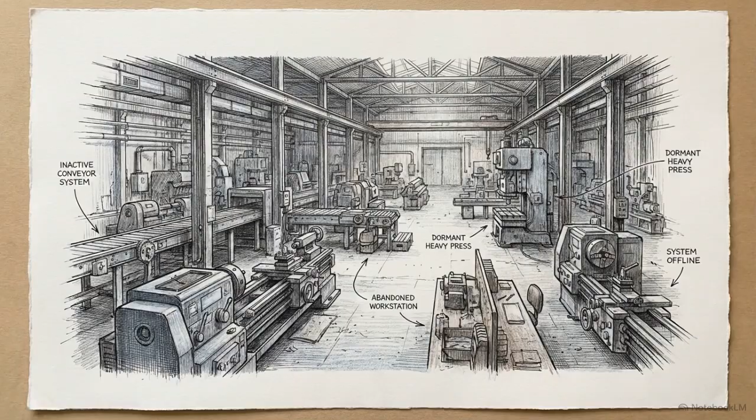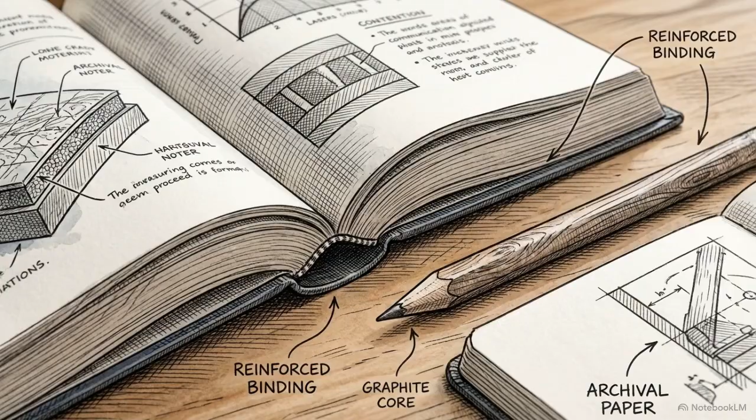By cutting healthcare spending and expanding the labor pool simultaneously, clean water allows capital to circulate back into local commerce. The savings on medicine and the increase in productive hours create a compounding financial effect. This shift generates a calculated 7-to-1 return on investment. Every dollar spent on the infrastructure creates $7 of realized economic benefit, proving water is a powerful multiplier.

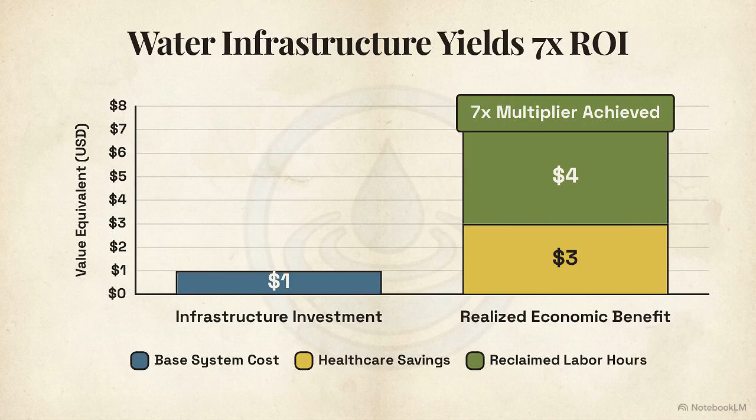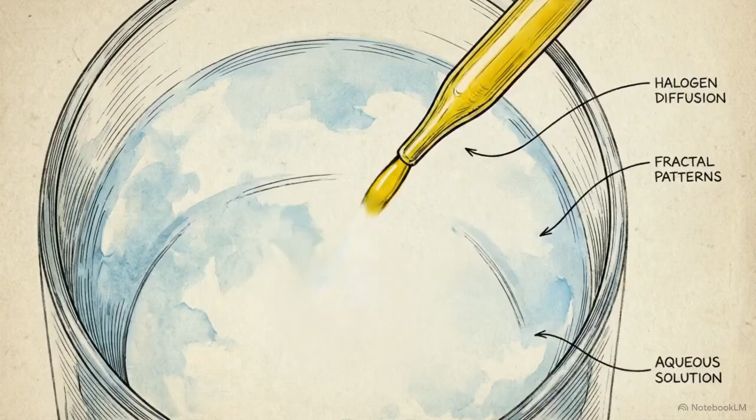To capture those economic returns, modern engineering has pursued a specific mandate, guaranteeing the absolute molecular purity of the water supply. Traditional purification relies on high thermal energy. Boiling water for at least 1 minute effectively destroys bacteria and viruses, but sustaining that temperature requires substantial fuel inputs. Other methods introduce chemical halogens, tiny amounts of chlorine, iodine, or bleach to neutralize biological threats. While effective, these additives change the water's chemical makeup.

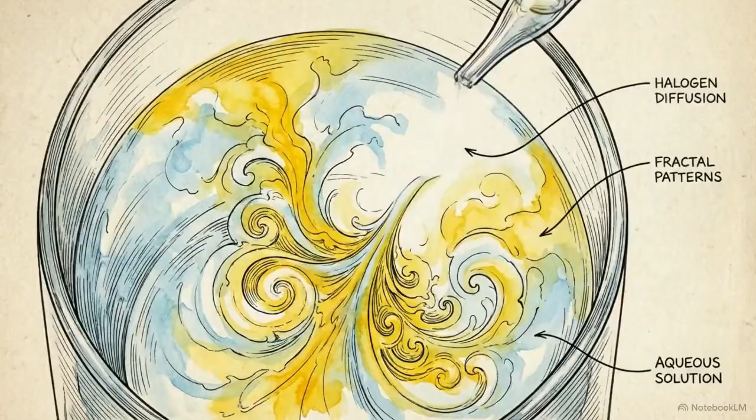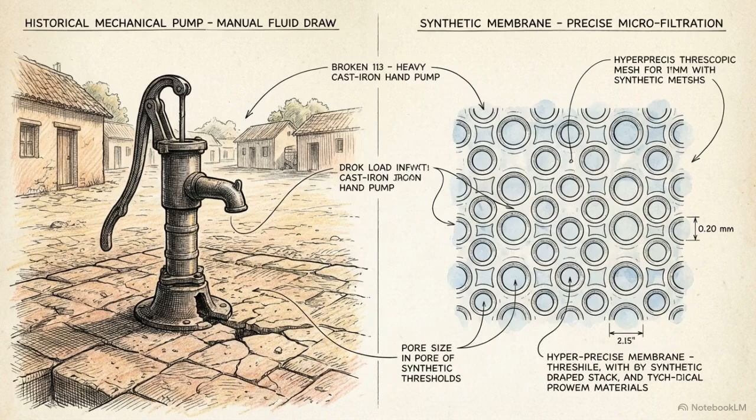Industrial engineering offers a high-tech alternative, precision filtration systems designed to physically extract pure water molecules without relying on thermal energy or chemical additives. If high-tech systems can guarantee perfectly pure water, why are they not the immediate default solution for every community facing a water crisis?

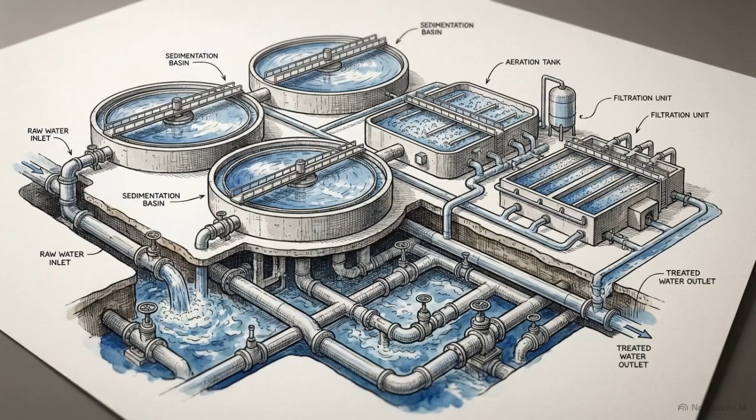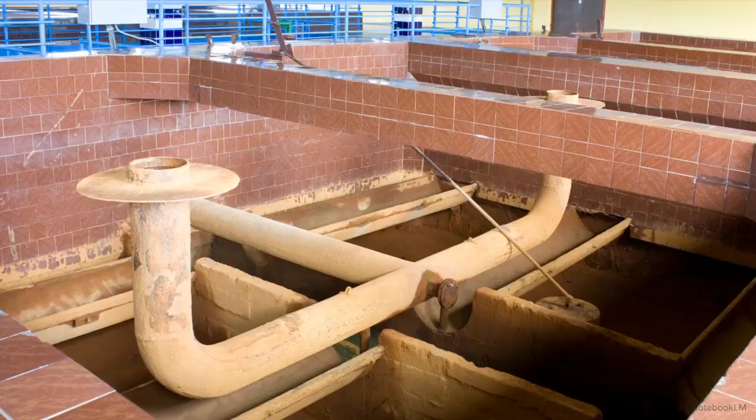To understand the modern approach, we must look at how traditional bulk purification works. These systems sort water based on macroscopic physical properties, rather than microscopic molecular exclusion. Large treatment plants rely on coagulation and flocculation. Chemicals are added to the water, causing tiny, suspended pieces of dirt to stick together into larger clumps. Because these clumps are heavy, they sink to the bottom of the tank in a process called sedimentation, leaving the clear water separated on top.

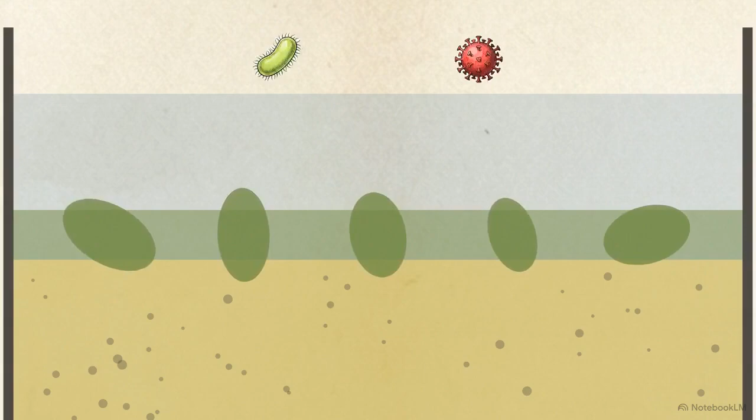Other methods use biological filtration. In a biosand filter, a cultivated layer of microorganisms grows on top of sand layers. This biofilm actively preys on and consumes pathogens as the water passes through. While effective against dirt and some bacteria, these systems struggle to capture dissolved chemical compounds that remain suspended in the fluid. Achieving absolute chemical-free purification requires moving beyond bulk separation to highly engineered physical barriers.

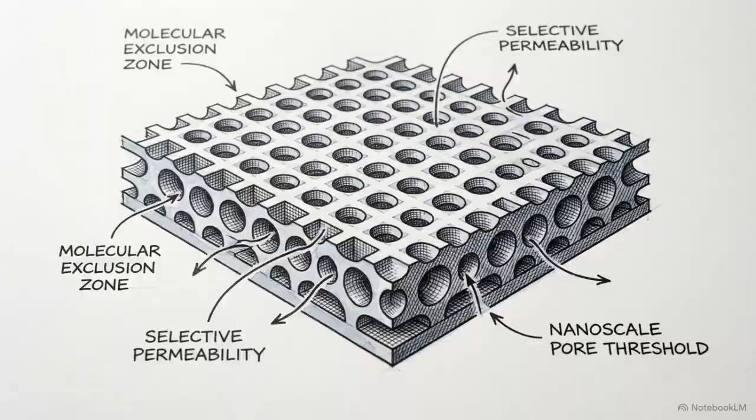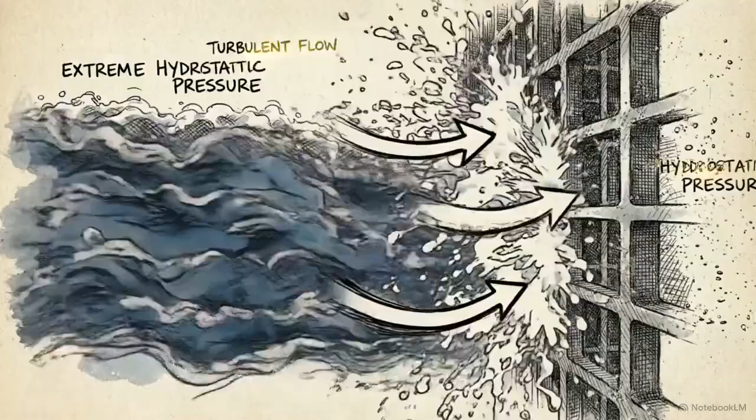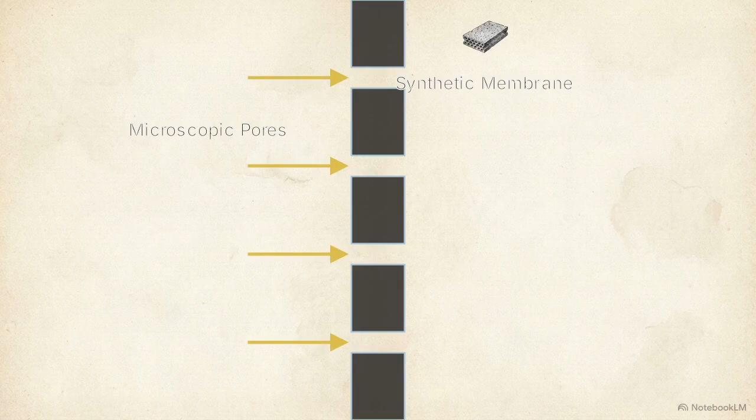This brings us to semi-permeable membranes. These materials act as screens with microscopic holes. Utilizing these membranes requires significant force. High hydrostatic pressure is used to drive raw water directly against the synthetic barrier. This cross-section shows the structure of the membrane. The microscopic pores are engineered to exact dimensional thresholds, creating a strict physical filter.

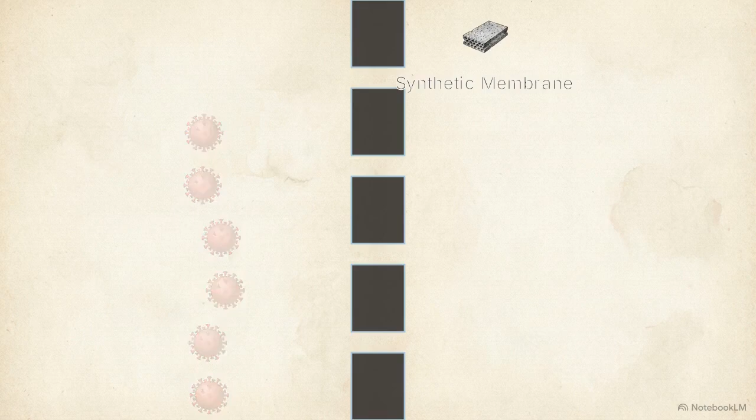Macroscopic dirt and sediment particles strike the surface and are instantly halted, as their physical dimensions exceed the size of the holes. Biological pathogens, including large bacteria, similarly fail to breach the dimensional threshold. Even microscopic parasites and viral agents are entirely excluded by the strict tolerances of the structure. The pores are so tight that even dissolved chemical compounds are blocked, isolating the target molecule. Only pure water molecules possess the precise dimensions necessary to squeeze through the membrane and reach the permeate side. This absolute physical exclusion creates a chemically perfect output.

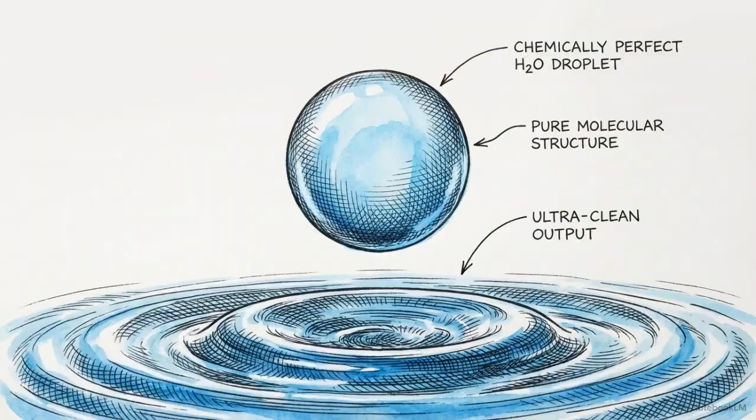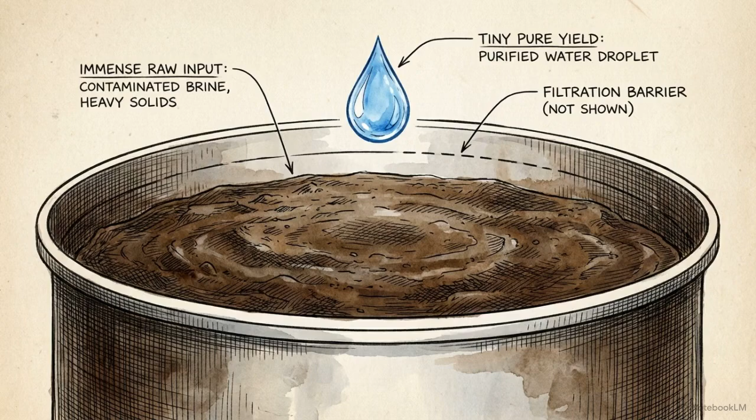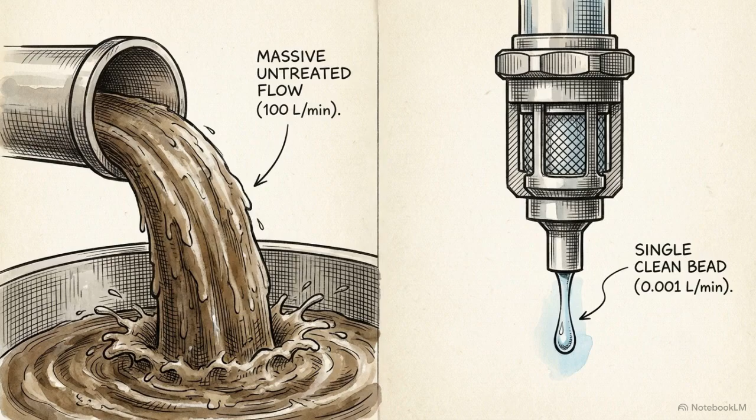However, achieving this microscopic precision introduces severe resistance into the overall system. When we shift focus from the pure output back to the raw input, the volumetric cost of this process becomes apparent. Forcing fluid through microscopic holes imposes a substantial flow rate penalty. These systems clean water much slower than other operational methods. This resistance results in volumetric inefficiency, a mandatory constraint where large amounts of water are required just to operate the system.

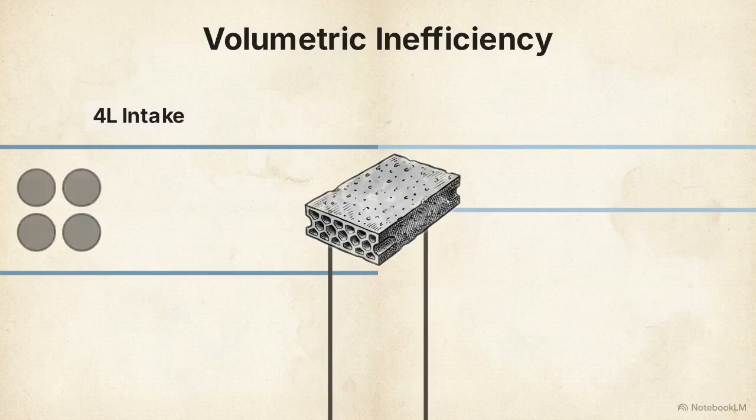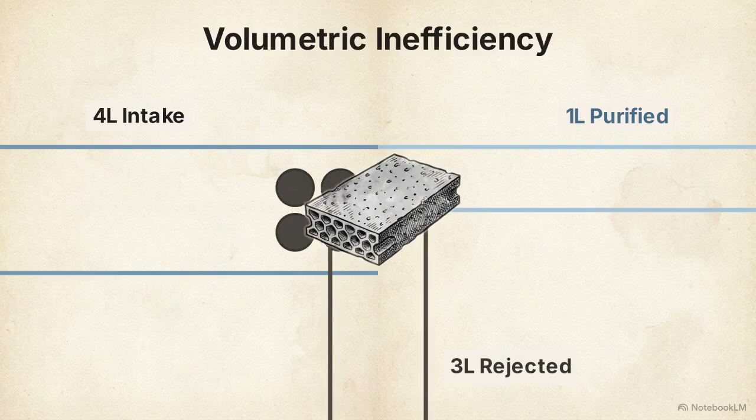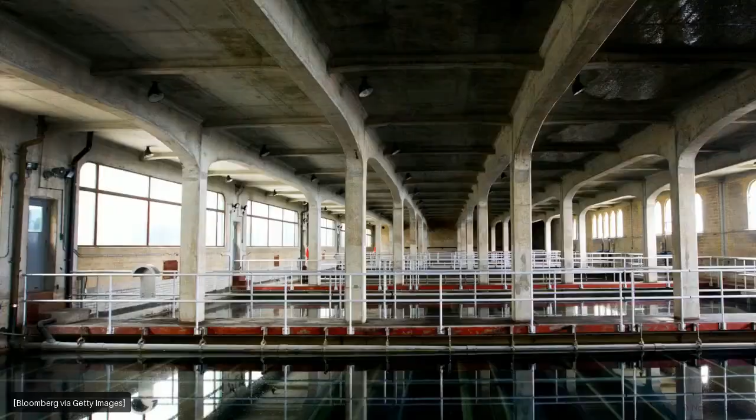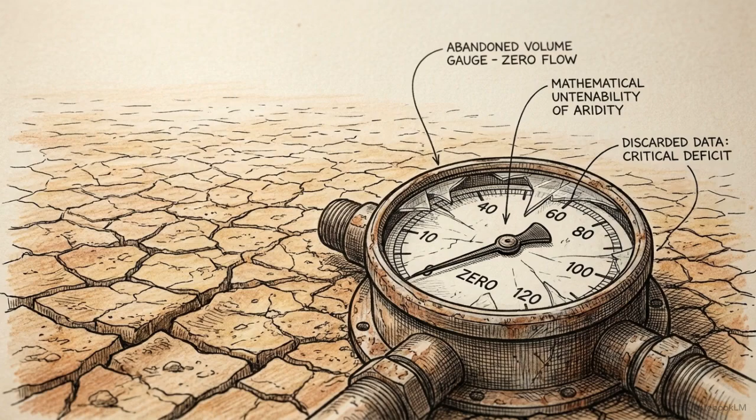This diagram illustrates the intake ratio. Reverse osmosis systems require drawing in 4 liters of raw water. The system yields exactly 1 liter of purified water, while the remaining 3 liters are diverted into a rejection pipe. The rejected water leaves the system as a highly concentrated brine, carrying all the contaminants blocked by the membrane. Contrast this with traditional municipal operations, which process vast volumes of water without generating extreme rejection rates. In arid regions where raw water is scarce, throwing away 75% of the intake volume is mathematically untenable.

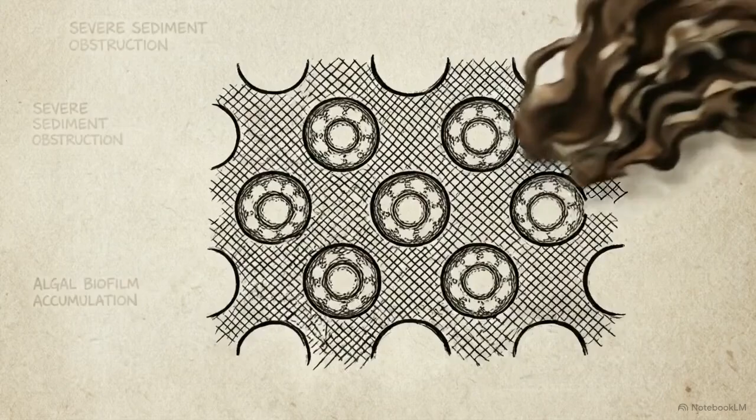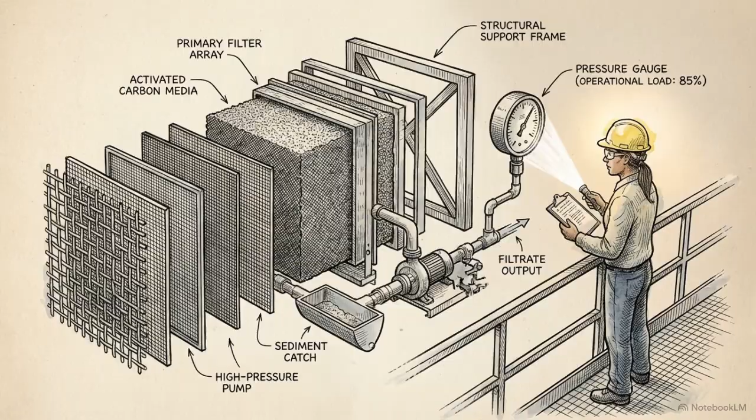Pushing water through these tight pores also leads to the long-term physical degradation of the hardware itself. Continuous operation inevitably leads to membrane fouling. Blocked dirt, particles, and biological growth like algae accumulate directly onto the microscopic pores. Fouling increases the system's operational burden. To maintain safety, parts must be constantly monitored, subjected to frequent cleaning cycles, and replaced at a significant cost of time and money.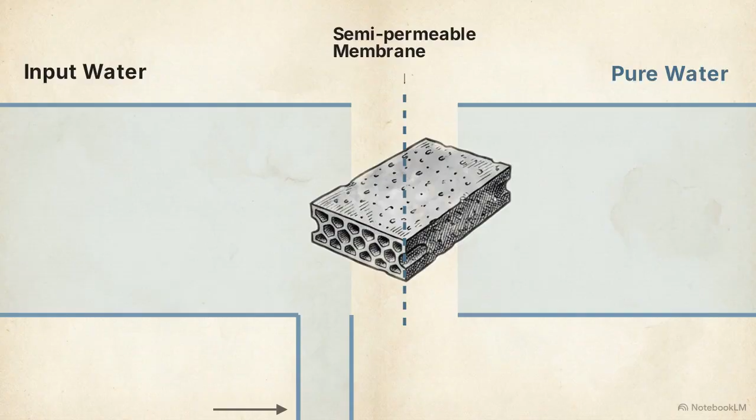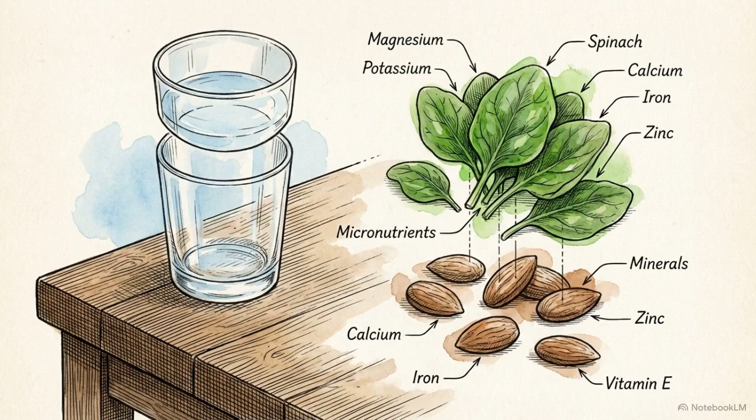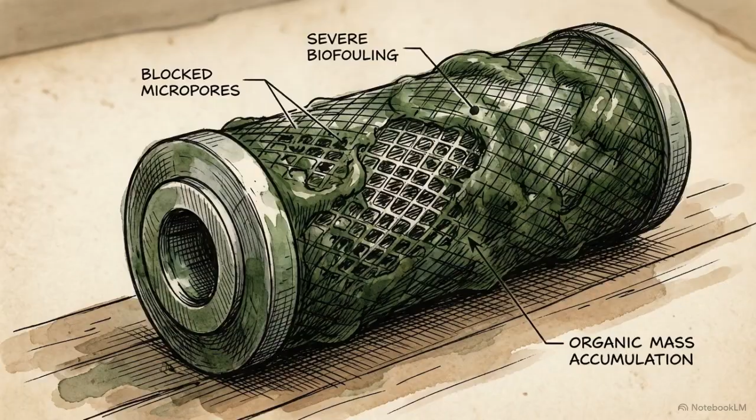Additionally, there is a biochemical consequence for the human populations drinking this overpurified output. Because the filters are strong enough to block nearly everything, they indiscriminately strip away healthy, essential minerals, specifically calcium and magnesium. Losing these minerals makes the clean water taste flat. More critically, it removes a vital dietary micronutrient source from the local population. While these systems offer high molecular precision, their trade-offs include slow production, high waste ratios, and frequent fouling. Engineers must match the filtration tool to the specific socioeconomic reality.